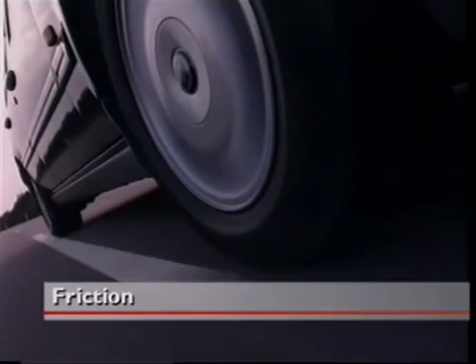Friction is a force that resists the movement of one surface over another. It can be desirable, but often is not. It is caused by surface rough spots that lock together. These spots can be microscopically small, which is why even surfaces that seem to be smooth can experience friction. Friction can be reduced, but never eliminated.

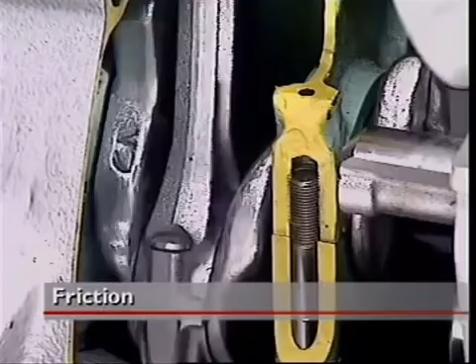Friction is always measured for pairs of surfaces using what is called a coefficient of friction. A low coefficient of friction for a pair of surfaces means they can move easily over each other. A high coefficient of friction means they cannot move easily over each other.

An engine that is quite powerful may not be designed to produce its maximum power over long periods. A petrol engine in a car may give good acceleration in short bursts, but it can overheat or fail if it's operated at maximum speed and power for too long.

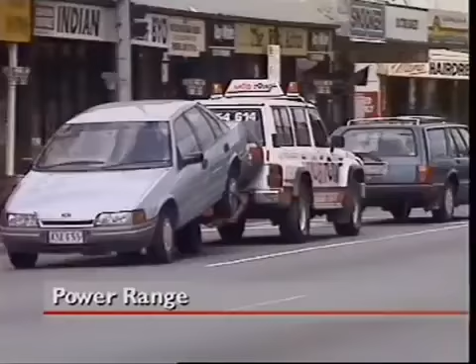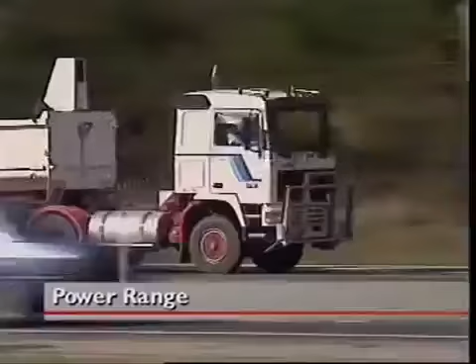A heavy-duty diesel engine in a large truck is designed to operate near or at its maximum speed and load for long periods without damage. Many diesels will suffer if they are run on light loads or at low speeds for too long.

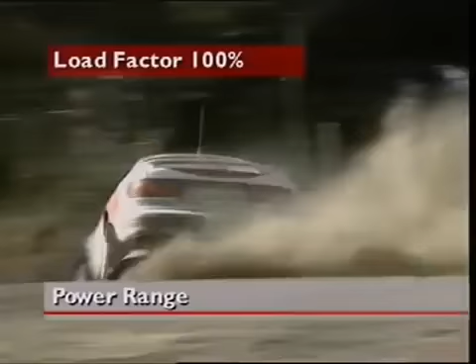One way to describe the power range of an engine is to give its load and speed as an average over a certain period. This is stated as a percentage and is called load factor. An engine required to operate at maximum power over 10 hours is said to have a load factor of 100%. Using that as a standard, most car engines would operate at only about 20 to 30%.

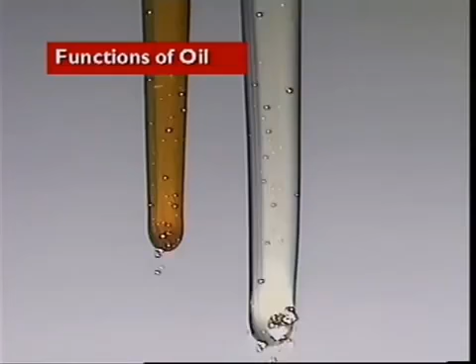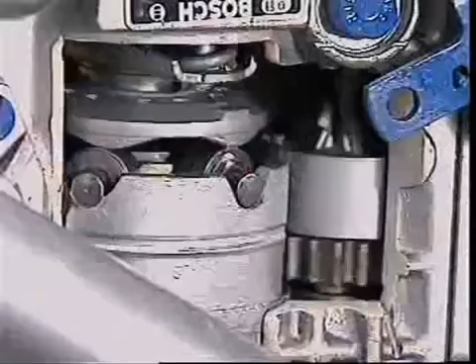One function of a lubrication system is to reduce friction. Friction occurs between all surfaces in contact. When moving surfaces come together, friction tends to slow them down. Sometimes that's just what's wanted. Friction can be useful, but it can also cause serious damage.

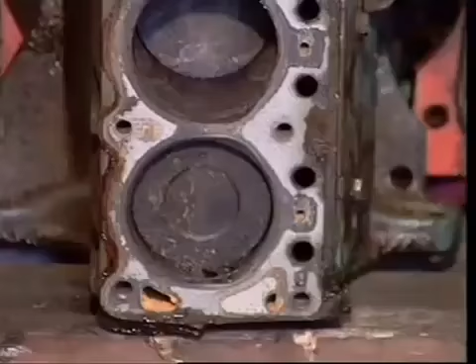It can make metal parts so hot they melt and fuse together. When that happens, an engine is said to have seized. How long an engine lasts depends to a large extent on how well it's lubricated, especially at the points of extreme loading.

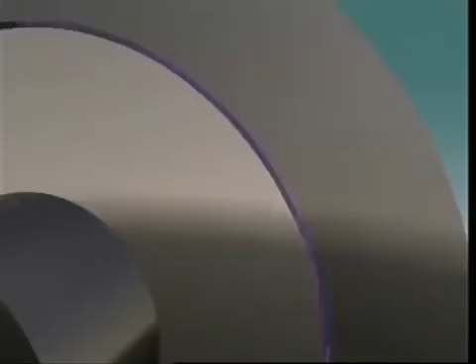So lubrication reduces unwanted friction and controls it where it is useful. It reduces wear on moving parts. Clearances fill with oil so that engine parts move or float on layers of oil instead of directly on each other. Much less power is needed to move them, and that's a plus.

It helps cool an engine. It collects heat from the engine, then returns to the sump where it cools. It helps absorb shock loads. A power stroke can suddenly put as much as 2 tons force on main bearings. Layers of oil cushion this loading.

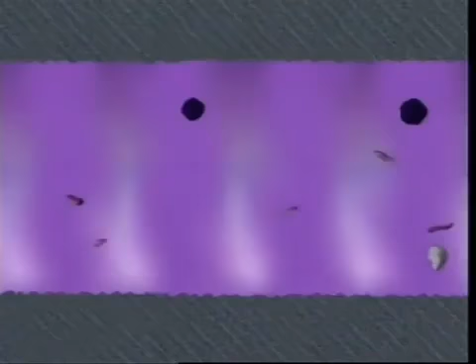Oil is also a cleaning agent. It collects particles of metal and carbon and carries them back to the sump. Larger pieces fall to the bottom.

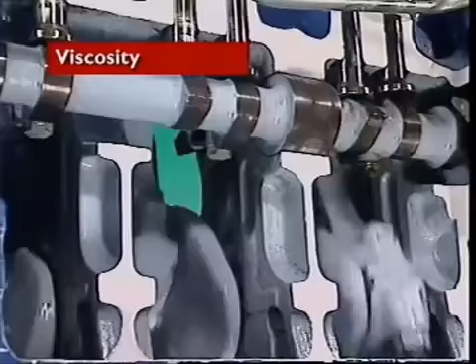For oil to do all of the work that's expected of it, it must have special properties. Its viscosity is crucial. Viscosity is a measure of how easily a liquid flows. Low viscosity liquid is thin and flows easily. High viscosity liquid is thick and flows slowly.

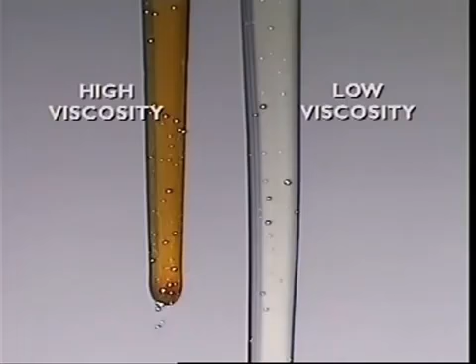Lubricating oil must be thin enough to circulate easily between moving parts, but not so thin that it will be forced out from between them. If it is forced out, parts will be left in direct contact and they'll be damaged. If it's too viscous, it moves too slowly to protect parts, especially in a cold engine.

It was once normal practice for engines to need one grade of oil for summer and another for winter. Oils are graded or classified by the American Society of Automotive Engineers, or SAE. An engine oil with an SAE number of 50 has a higher viscosity, or is thicker, than an SAE 20 oil.

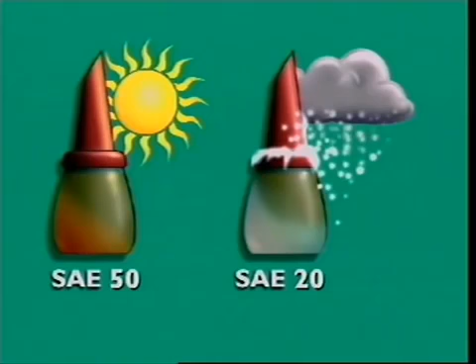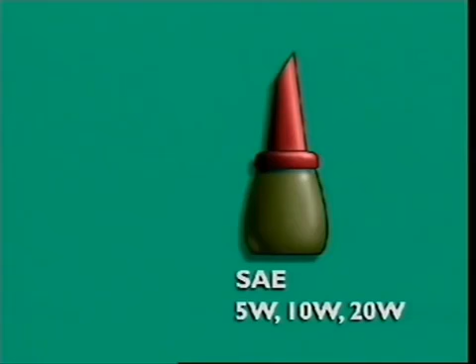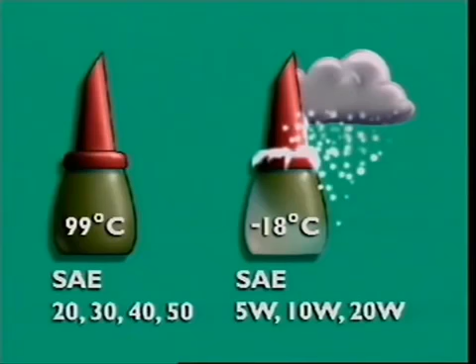Oils with low viscosity ratings, say SAE 5W, 10W and 20W, were tested at a low temperature, around minus 18 degrees Celsius, and were used for cold conditions. Oils with high viscosity ratings, say SAE 20, 30, 40 and 50, were tested at a high temperature, around 99 degrees Celsius, and were used for hotter conditions.

Modern oils, however, are blends of oils which combine these properties. The oils are blended with additives called viscosity index improvers to form multigrade or multi-viscosity oils. They provide better lubrication over a wider range of climatic conditions than monograde oils.

Oil is also classified by the American Petroleum Institute, or API, service classification. Oils for spark ignition engines carry a prefix S, and diesel or compression ignition engines use C. Some oils have additives that make them suitable for both. Manufacturers recommend which viscosity and API classification is ideal for a particular engine.

Special chemicals called additives are added to the base oil by the oil companies. Different combinations of these additives allow the oil to do different jobs in an engine.

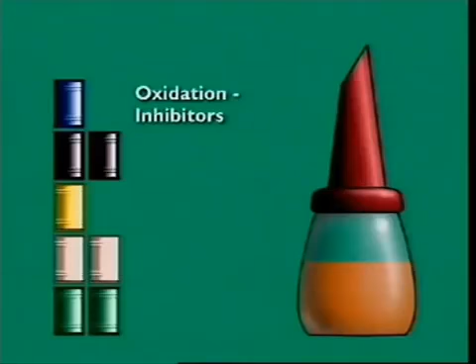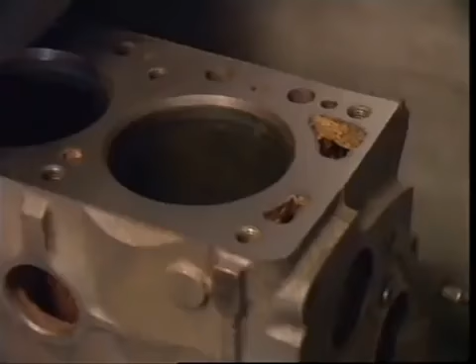Extreme pressure additives coat parts with a protective layer so that the oil resists being forced out under heavy load. Oxidation inhibitors stop very hot oil combining with oxygen in air to produce a sticky material like tar that clogs galleries. Corrosion inhibitors help stop acids forming that cause corrosion, especially of bearing surfaces. Anti-foaming agents reduce the effect of oil churning in the crankcase and minimize foaming.

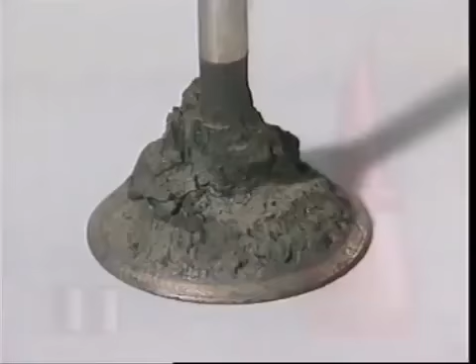Detergents reduce carbon deposits on parts like piston rings and valves. Dispersants collect particles that can block the system, separate them from each other and keep them moving. Then they will be removed when the oil is changed.

Most small four-stroke petrol engines use what is called splash lubrication. On horizontal crankshaft engines, a dipper on the bottom of the connecting rod scoops up oil from the crankcase for the bearings. In this engine, it is also able to splash oil up to the valve mechanism.

Alternatively, an oil slinger can be driven by the camshaft. A similar system is used in most small vertical crankshaft engines. Oil is also splashed up to the valve mechanism.

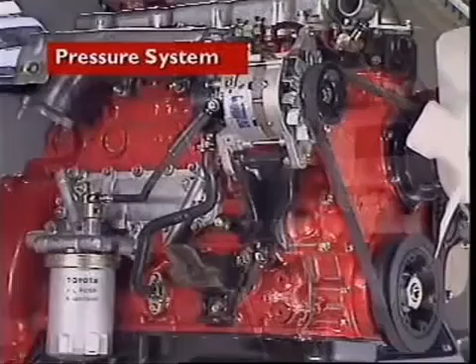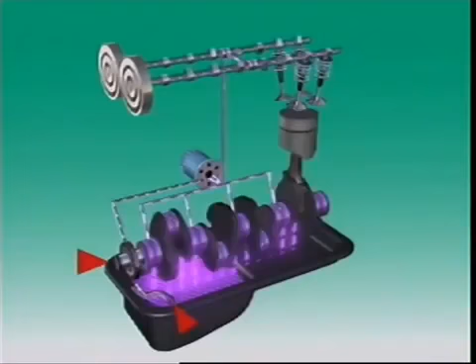Modern vehicle engines use a pressure or force feed lubrication system where the oil is forced around the engine under pressure. Let's look at petrol engines first. Oil won't flow up into the engine by itself, so a pump collects it through a pickup tube and a strainer and forces it through an oil filter, then into passageways in the engine block called galleries.

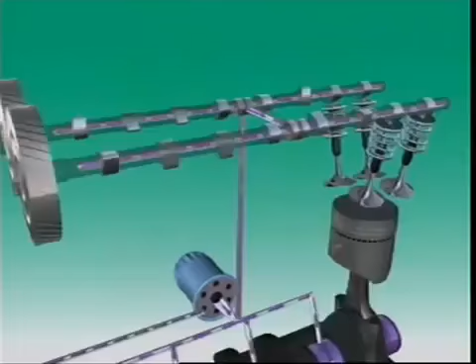The galleries allow oil to be fed to the camshaft bearings, the valve mechanism and the crankshaft main bearings. Holes drilled in the crankshaft webs allow the main bearings to supply oil to the big end bearings. After circulating through the engine, the oil falls back to the sump to cool.

This is called a wet sump lubrication system because the oil is kept in the sump ready for the next time it's used.

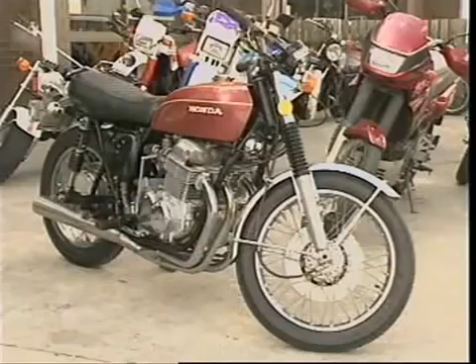Some special engines use a dry sump lubrication system. It uses all of the parts that make up a wet sump system and it lubricates the engine in the same way. It differs from the wet sump system in the way the oil circulates.

In a dry sump system, the oil falls to the bottom of the engine into an oil collection pan. A scavenge pump then pumps it to an oil tank where it is stored until the normal oil pump collects it and pumps it through the filter and engine in the normal way.

Because there is no oil storage sump under the engine, it can be mounted much lower than in a wet sump system. The oil tank can be positioned away from the engine where it can get best cooling, and the amount of oil in the system can be much greater than in a wet sump system.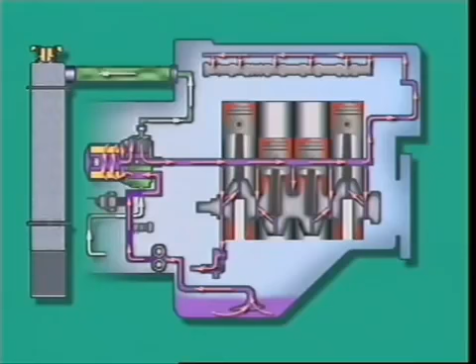Diesel engines are lubricated in much the same way as petrol engines, but there are differences. Diesel engines typically operate at the top end of their power range, so their operating temperatures are usually higher than those in similar petrol engines, so the parts in diesel engines are usually more stressed. As a result, diesel oils need a different range of properties and are classified differently.

It's common for some diesel engines to use an oil cooler to cool the oil in the engine. The cooler and oil filter are usually on the same mounting on the cylinder block.

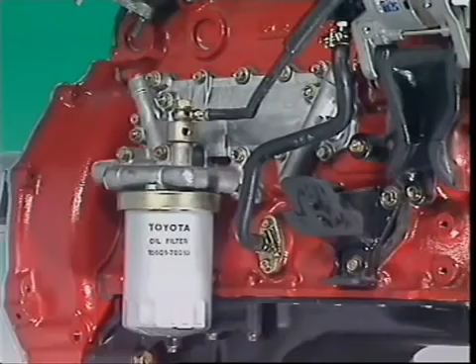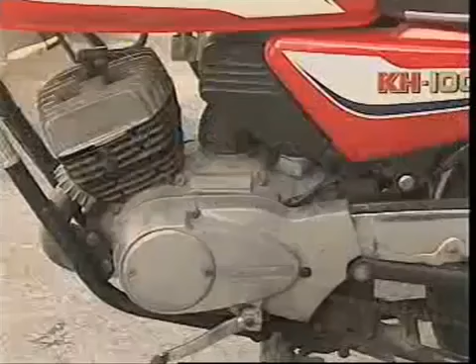Some two-stroke petrol engines use an oil injection system. This system doesn't need the oil and petrol mixed manually.

An engine-driven oil pump takes oil from a tank and pumps a measured amount directly into the engine, where it will mix with the fuel and lubricate the internal engine parts. The pump delivers the correct amount of oil for the engine speed and the throttle setting, which makes it a more precise system than running the engine on a fixed oil-petrol mixture.

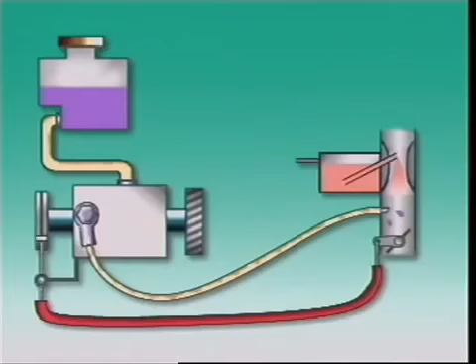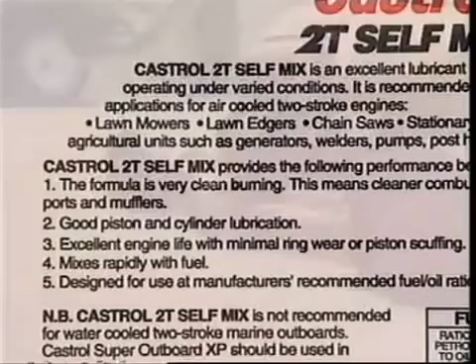Most two-stroke petrol engines use a set petrol oil mixture for lubrication. There are different kinds of oils and petrol oil mixtures. They must be used according to the manufacturer's specifications. For small two-stroke engines, the oil and fuel are pre-mixed.

A mixture of air, oil and fuel passes through a sealed crankcase on its way to the combustion chamber. That makes the crankcase part of the fuel intake system, so it can't be used as a sump.

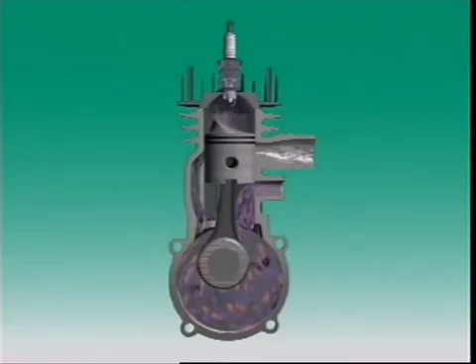As the air, fuel and oil enter the crankcase, the fuel evaporates, leaving behind enough oil to keep parts coated and lubricated.

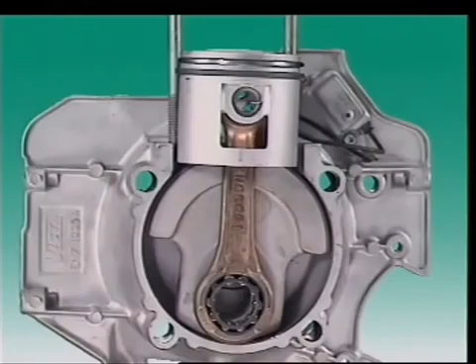The crankshaft and connecting rod bearings in two-stroke engines are ball and roller types. Because the parts of this kind of bearing only roll over each other, they only need a minimum of lubrication.

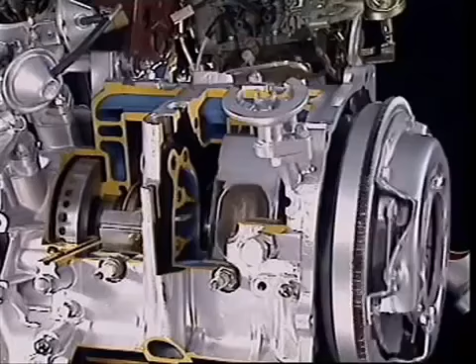Let's look at the rotary engine lubrication system. Its main lubrication system is similar to that of a four-stroke petrol engine.

An oil pump picks up oil from the oil pan through a strainer and delivers it to an oil cooler on the front of the engine. The oil cools, then enters the oil filter at the rear of the engine.

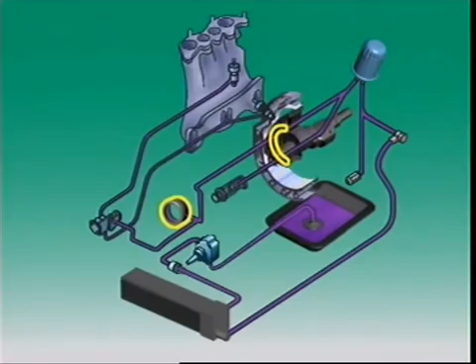A regulator valve controls the oil pressure in the system. The oil goes onto the main bearings and rotor bearings and is sprayed into rotor cavities. Along the way, it absorbs heat, then returns to the oil pan.

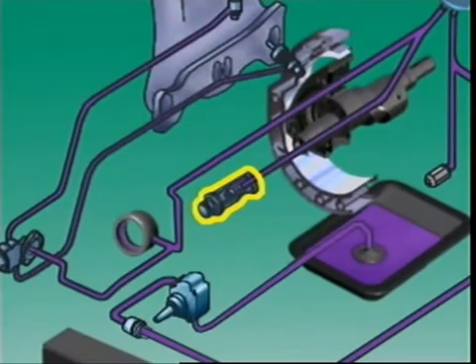A bypass valve at the end of the eccentric shaft helps the engine warm up. When the engine is cold, it stays open and sends oil from the shaft to the oil pan and stops it spraying on the rotors.

As the engine heats, the valve starts to close. Pressure in the shaft builds up and cooling oil starts to spray on the rotors.

The rotary engine uses oil injection. A pump sends oil to oil nozzles in the intake manifold and to oil nozzles in the intake passages in the rotor housings. Oil from these nozzles goes to the engine and lubricates the rotor seals.

If the engine has a turbocharger, oil lubricates it as well.

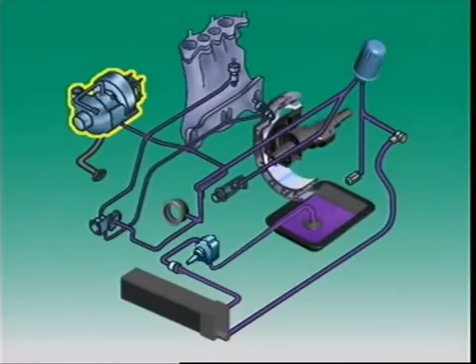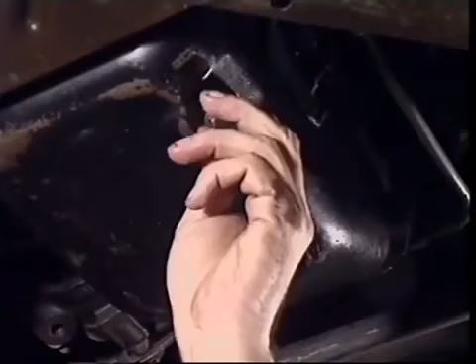This section examines the sump. The sump is bolted to the engine under the crankcase. It is a reservoir or storage container for the engine lubricating oil and a collector for oil returning from the engine lubricating system. The sump can be formed as a thin sheet metal pressing and shaped to ensure that oil will return to its deepest section.

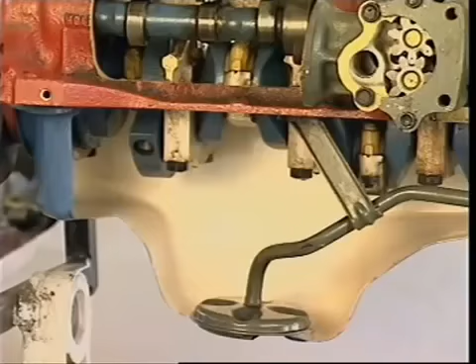The oil pickup tube and strainer are located in this deep section to ensure they stay submerged in oil and to prevent air being drawn into the oil pump.

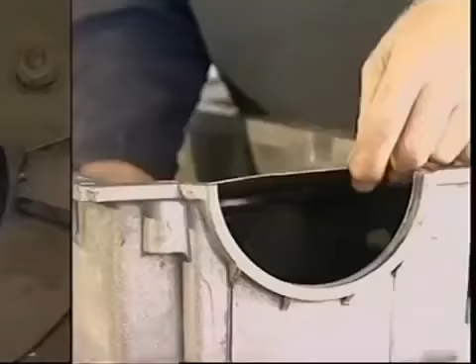Some high-performance vehicles have a windage tray fitted to prevent churning of the oil by the rotation of the crankshaft. Baffles prevent oil from surging away from the pickup during cornering, braking and accelerating.

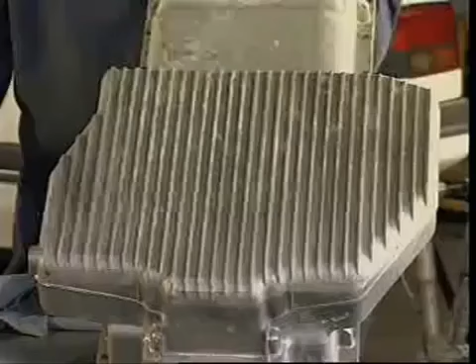The sump's large external surface area helps heat transfer from the oil to the outside air. In some designs, the sump is an aluminium alloy casting with fins and ribs to assist in this heat transfer.

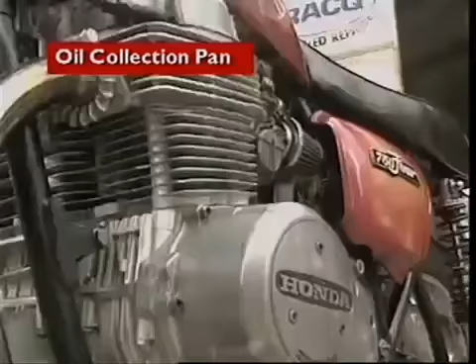The oil collection pan is part of the dry sump system which is used in some motorcycles. It replaces the sump in the wet sump system, but it is much smaller.

It collects the oil after it is circulated through the engine and directs it to the pickup strainer on the scavenge pump. Since no oil is stored in the engine in this system, a dipstick that is normally used to check oil levels in the sump is not needed.

The oil tank is part of the dry sump lubrication system. It is usually positioned away from the heat of the engine, and the large surface area improves cooling.

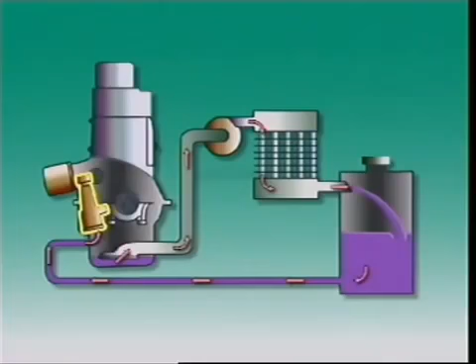It receives oil from the scavenge pump and allows it to settle and cool. The main oil pump then pumps it back through the lubrication system. A dipstick is often provided to measure the oil level.

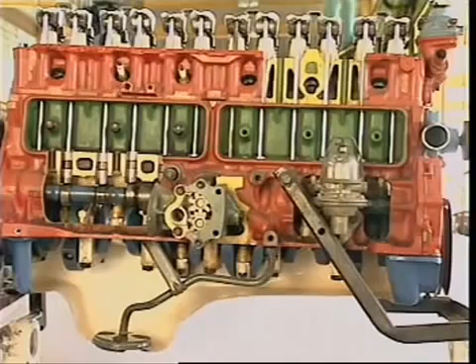Between the sump and the oil pump is a pickup tube with a flat cup and a strainer immersed in the oil. The strainer stops large particles of dirt and carbon entering the pump and damaging it. The pickup tube leads to the inlet of the oil pump on the low pressure side of the pump.

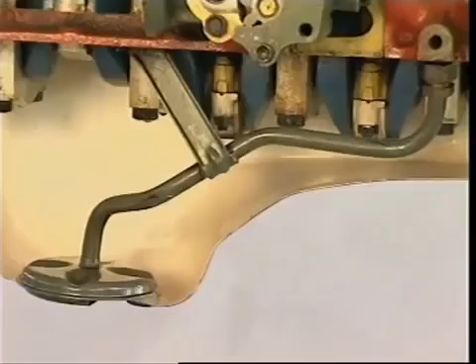Oil pumps may be driven from the camshaft or the crankshaft.

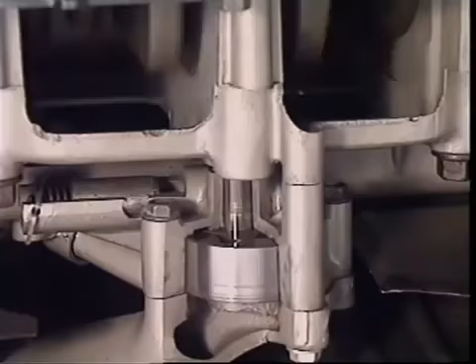In a rotor-type oil pump, an inner rotor drives an outer one. As they turn, the volume between them increases. This larger volume lowers the pressure at the pump inlet.

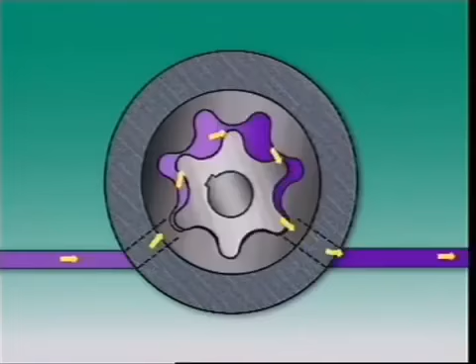Outside atmospheric pressure is then higher. This forces oil into the pump, and it fills the spaces between the rotor lobes. As the lobes of the inner rotor move into the spaces in the outer rotor, oil is squeezed out through the outlet. The crescent pump uses a similar principle.

It is mounted on the front of the cylinder block. The inner gear is on the end of the crankshaft, which then drives the pump directly. An internal toothed gear meshes with this inner one. Some gear teeth are meshed, but others are separated by the crescent-shaped part of the pump housing.

The increasing volume between gear teeth causes pressure to fall. Oil is then taken through the intake port and carried around between the gears and crescent, then discharged to the outlet port.

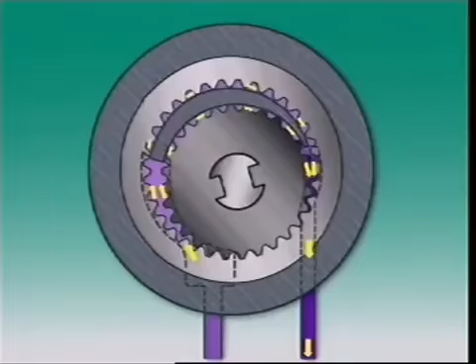In a gear-type oil pump, the driving gear meshes with a second gear. As both gears turn, their teeth separate, creating a low pressure area. Higher atmospheric pressure outside forces oil up into the inlet, and the spaces between the teeth fill with oil.

The gears rotate and carry oil around the chamber. The teeth mesh again, and oil is forced from the outlet toward the oil filter.

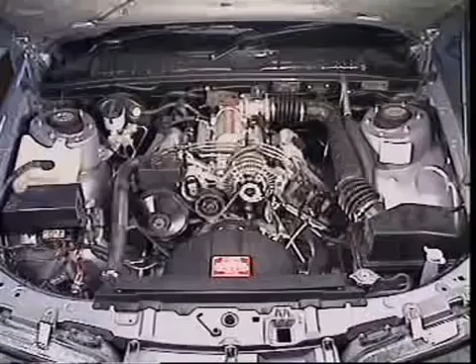A normal pump is capable of delivering more oil than an engine needs. It's a safety measure to ensure the engine is never starved for oil. As the pump rotates and engine speed increases, the volume of oil delivered also increases.

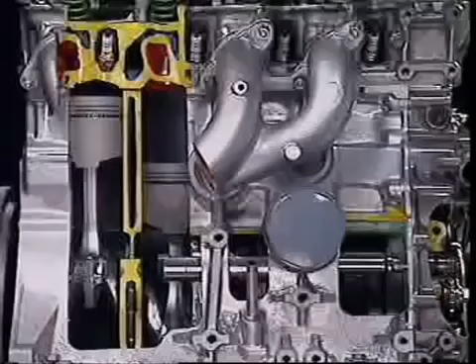The fixed clearances between the moving parts of the engine prevent oil escaping back to the sump, and pressure builds up in the system. An oil pressure relief valve stops excess pressure developing. It's like a controlled leak, releasing just enough oil back to the sump to regulate the pressure of the whole system.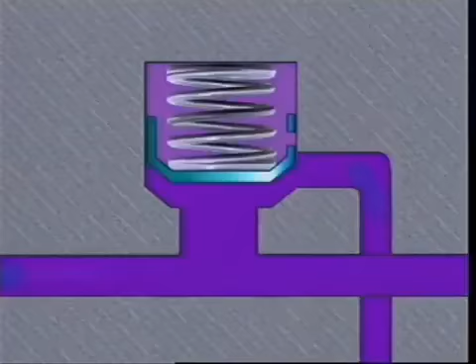This section examines oil filters. There are two basic oil filtering systems: full flow and bypass. The full flow type filters all of the oil before delivering it to the engine. The bypass type only filters some of the oil.

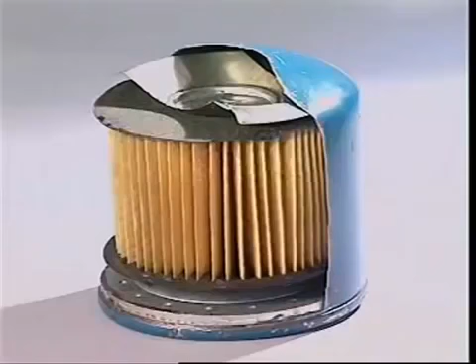The full flow type is the more common. Its filter uses pleated filtering paper in a metal housing to collect harmful particles.

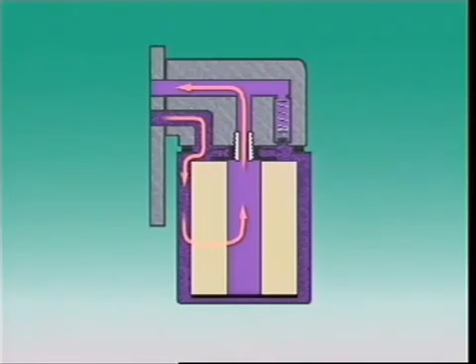Normally, all oil goes through the filter before it gets to the engine, but if the filter clogs up, it can starve an engine of oil. As a safety measure, full flow filters have a bypass valve. If the filter clogs, this valve opens and directs unfiltered oil to the engine. Dirty oil is better than none at all.

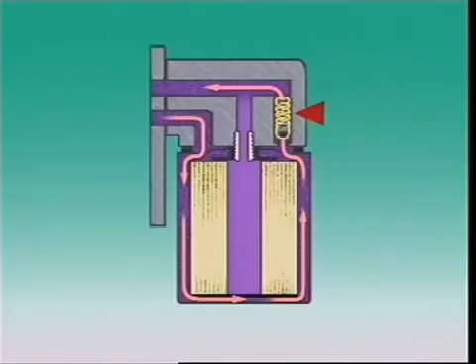Most oil filters on diesel engines are larger than those on similar petrol engines, and some diesel engines have two oil filters. Diesel engines produce more carbon particles than petrol engines, so the oil filter can have a full flow element to trap larger impurities and a bypass element to collect sludge and carbon soot.

In a bypass system, the bypass element filters only some of the oil from the pump by tapping an oil line into an oil passage. It collects finer particles than a full flow filter. After this oil is filtered, it goes back to the sump.

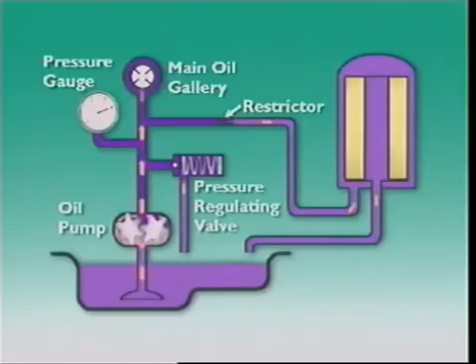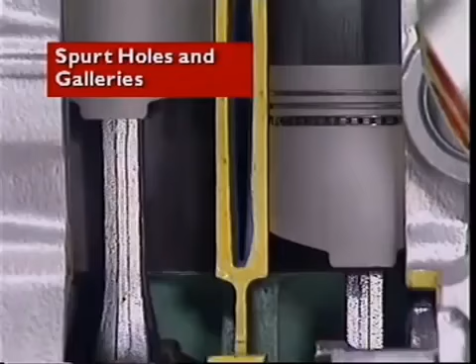Pistons, rings and pins are lubricated by oil thrown onto the cylinder walls from the connecting rod bearings. Some connecting rods have oil spurt holes.

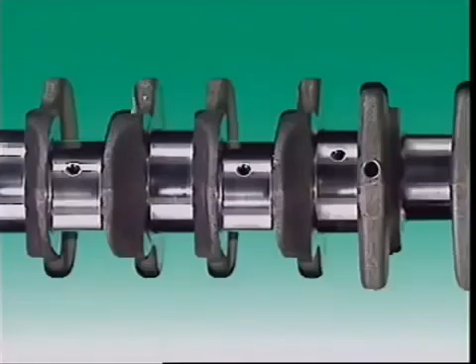These holes are positioned to receive oil from similar holes in the crankshaft. Oil can then spurt out at the point in the engine cycle when the largest area of cylinder wall is exposed. It lubricates the walls and gudgeon pin, and also cools the underside of the piston.

Oil feeds to the cylinder head and through a gallery to the camshaft bearings and valve train. As well as lubricating these moving parts, it also gathers heat from the engine, so its temperature keeps rising. Finally, it drains back to the sump to cool and start again.

If a lubrication system fails, it's serious, so it's crucial to know it's working. If oil pressure falls too low, a pressure sensor in a gallery can light up a warning light or register on a gauge. Low oil pressure can mean a lack of oil.

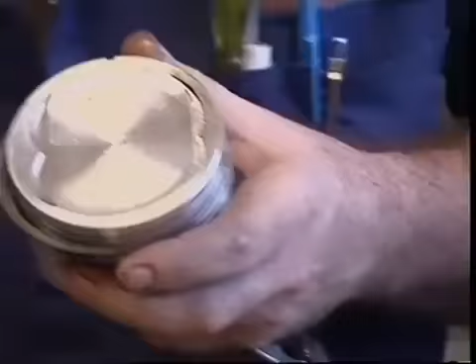It may have leaked away, or it may have been burned. This can be caused by worn piston rings which let oil into the combustion chamber. Some engines even use an automatic cutout that turns off the engine if oil pressure falls too low.

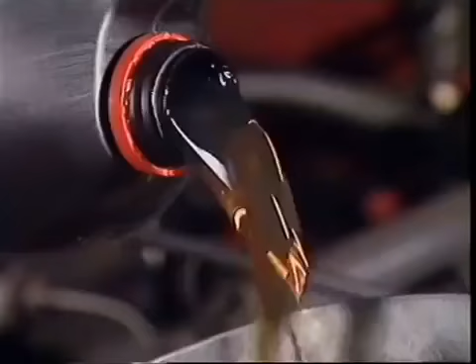Too little oil in the engine is a problem, but so is too much. The crankshaft can whip it into foam and cause leaks by flooding the seals. Of course, the simplest indicator of oil level is still the dipstick.

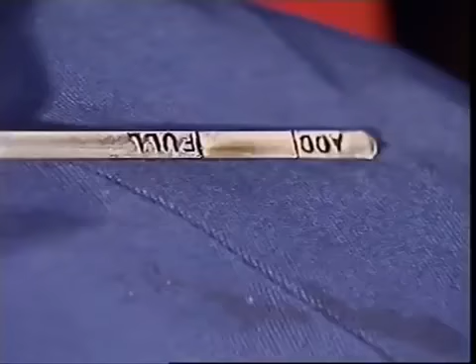Engines which operate under severe conditions may use an oil cooler to cool the oil in the engine. In diesel engines, the oil cooler and oil filter are often on the same mounting on the cylinder block. The oil cooler is a heat exchanger. It transfers heat from the oil to coolant from the cooling system.

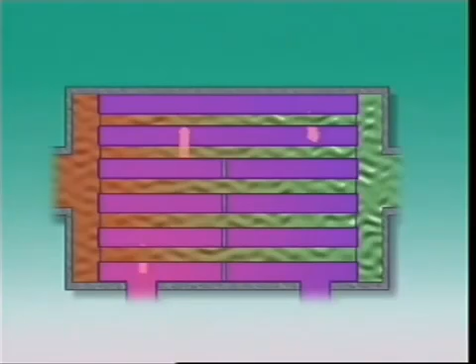Coolant circulates through tubes in the cooler, and oil fed from the lubrication system surrounds the tubes. As the coolant circulates, heat is removed from the oil.

In another design, the oil cooler is mounted in the airstream at the front of the vehicle. This type of oil cooler uses the flow of air passing across its fins to cool the oil circulating through it. It is called an oil-to-air heat exchanger.